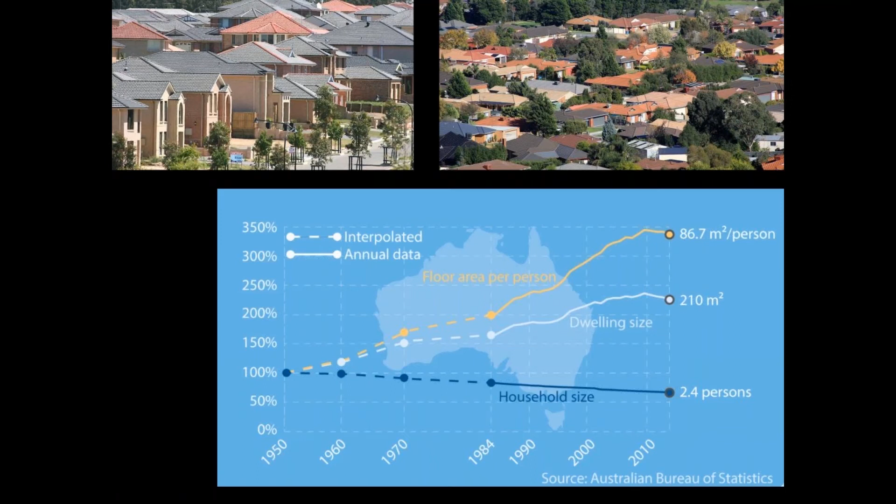So with all that we know today, why are we still consuming and degrading our land, our waters and sky with such a gusto? I'd like to suggest that we need to engage much more directly and empathetically with nature, especially as building designers and urban planners, because it's our actions that have extraordinary impact in this regard.

I fear that our souls no longer truly connect with the natural world, with the trees, the earth, the sea, as the souls of our forebears did. We watch David Attenborough on our TVs, and we fly across oceans as tourists when there's no COVID, to consume nature.

But we rarely venture into the forest right near our home to breathe in and give thanks to its majesty, and also to notice and mourn that it's suffering. We no longer put our hands into the soil to feel its warmth, its moisture, and its rich texture, to tend and savour its yield, without which we're going to go hungry.

So missing a profound personal connection with nature, and with our social gaze filtered on our buddies, and so struggling to see and feel things through the eyes and the hearts of others, how on earth are we to engage in the design of environmentally and socially empathetic homes and cities?

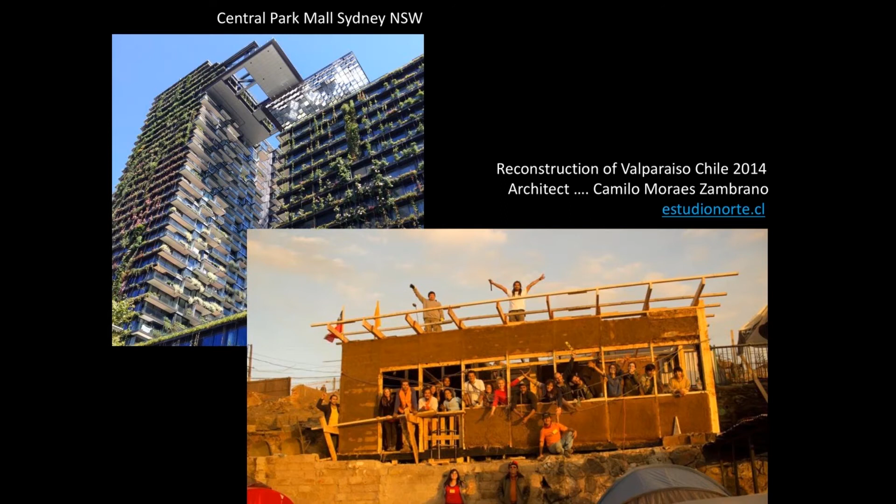Okay, so the following slides are from an outstation in south central Arnhem Land in Northern Territory, from Lake Tyers in East Gippsland, from Moa Island in the Torres Strait region, and from Palm Island in North Queensland.

I spent most of my first 12 years as an architect living and working with Aboriginal and Torres Strait Islander people in rural and remote parts of Australia.

So then, as now, Indigenous people from remote communities had very little opportunity to provide for their own housing or shelter needs. Government agencies delivered to communities housing which by its design was unsuited to the local climate and traditional lifestyle. And it adopted expensive and specialised construction methods that discouraged local labour input.

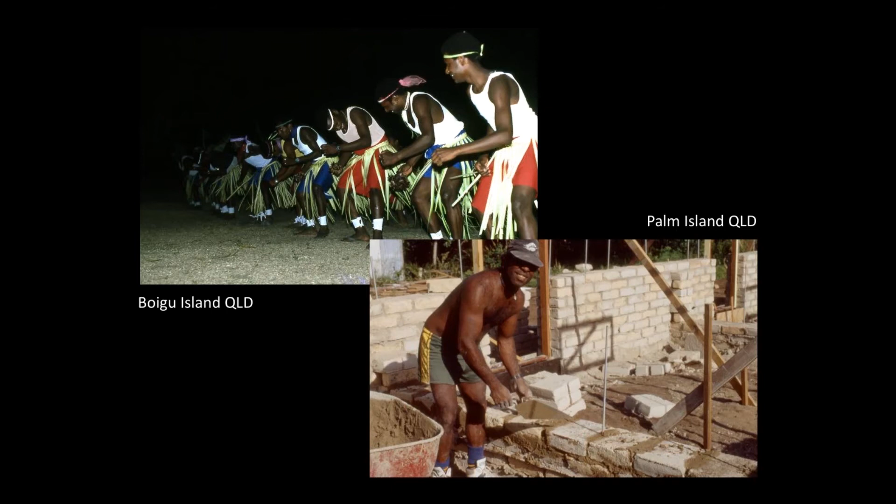Also, the government funds didn't go far, neither in product by way of roofs over heads, nor in the process of generating good work and a sense of homemaking in what were otherwise socially and culturally rich communities.

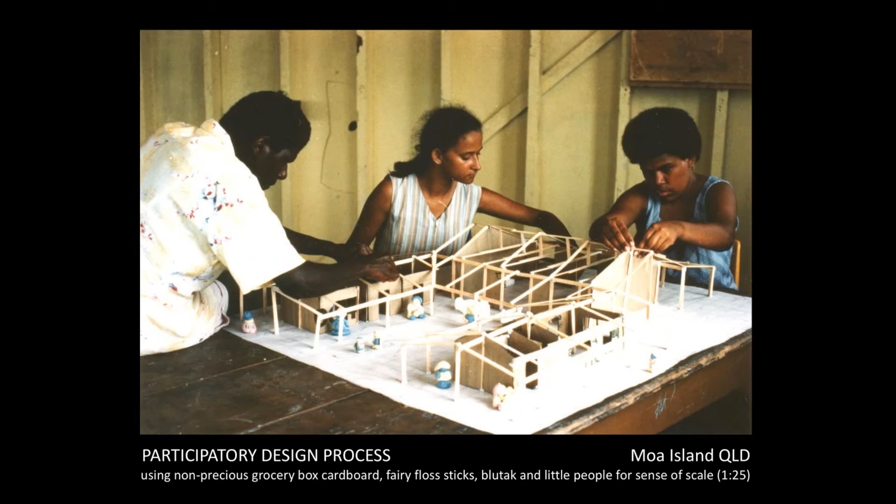My purpose in being there was firstly to encourage and assist the families who were without adequate shelter to design their own homes through hands-on model making workshops. These workshops centred on the rough and ready use of non-precious materials that helped families relax into continually building and demolishing parts of their model, so they could rework, discuss, and refine their evolving designs.

The workshops were accompanied by nights together under the stars in front of a projector screen in those days, discussing local climate, lifestyle, suitable building materials, and construction methods.

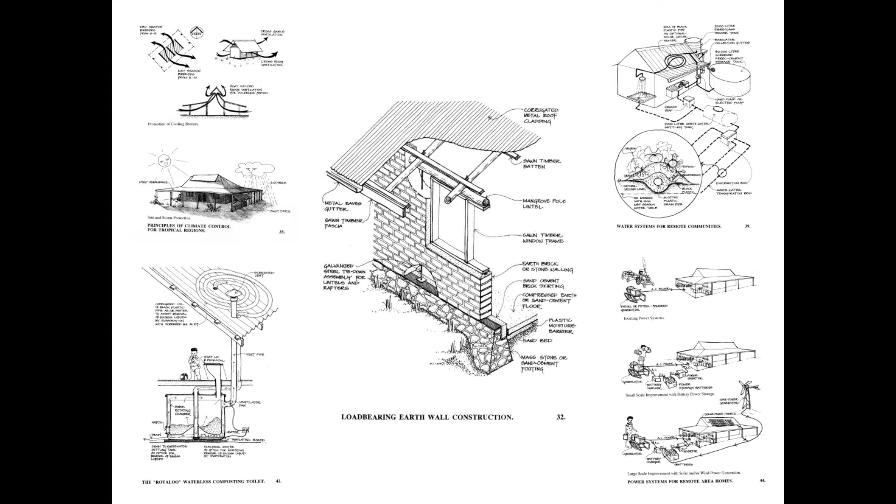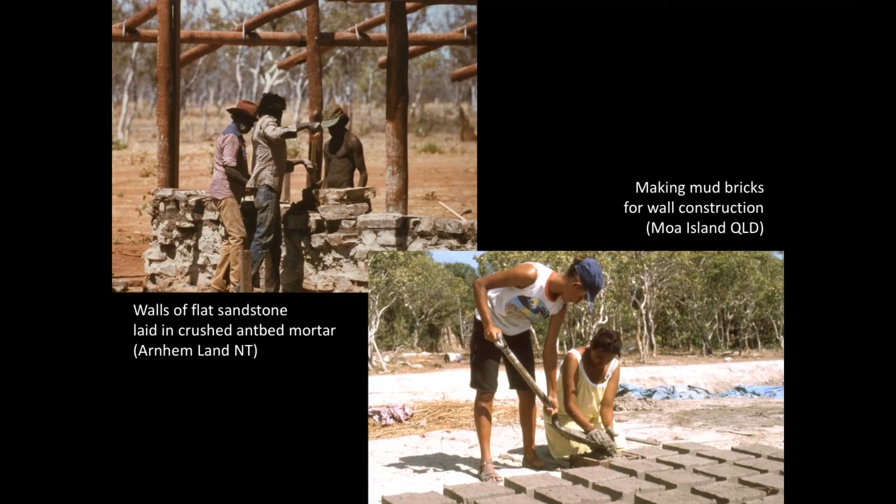The families then proceeded to build their own homes using materials freely available in the local bush. The floors were of puddled and waxed earth. The walls were of stone laid in crushed antbed mortar, or ram pressed or hand puddled earth bricks. The roofs were framed in timbers in raw pole form, or milled with a simple chainsaw attachment. Some internal screen walls were framed in sawn timbers and lined with split bamboo.

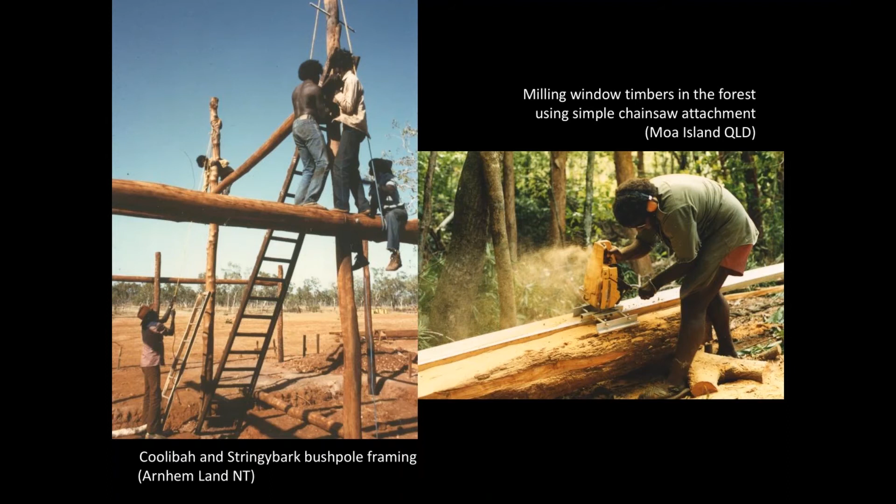I learned lots of great stuff in those years. To succeed, these self-help housing projects needed to start with a small and achievable scale of works. They needed a generous time frame that was realistic for self-help, which meant trying to shake off the time constraints typical in government funding cycles.

These projects needed a few truly committed and self-motivated prospective owner-builder families. They needed a genuinely and unanimously supportive community council, also modest financial support with no strings attached from one or two fair-minded public servants operating in low profile at the local level. Finally, they needed a commitment from myself to live and work with the community through both the design and construction phases.

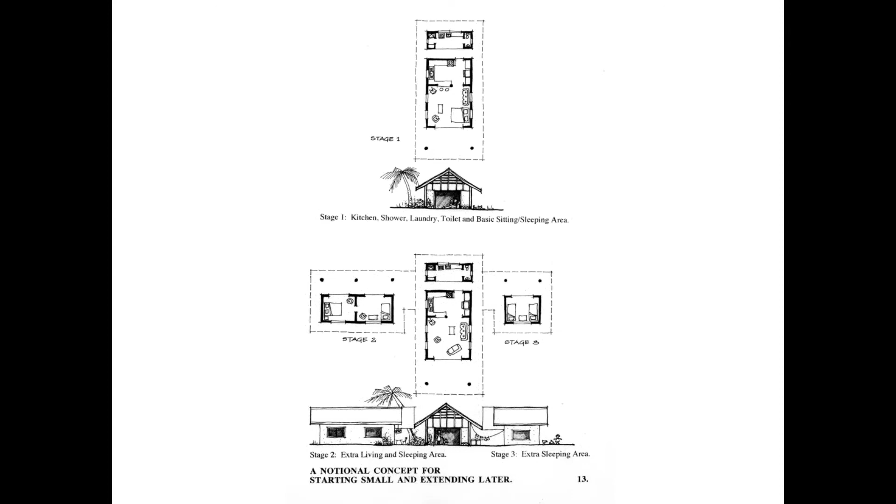The families had a common attraction towards stone and earth walling, which I found interesting. While they came to understand it offered no thermal benefit in a tropical climate, they chose it nonetheless because it was freely available in the bush, and also because, as they would say, it looked proper solid.

Traditional materials like bark, brush, bamboo, and woven palm were still favoured for temporary ceremonial structures and home decorating. But as primary building fabric, they were seen to provide inadequate storm shelter, pose a fire risk, and harbour vermin.

That white Australian desire for proper solid housing had really been taken on board, both in a functional and an aesthetic sense. My romantic dream for a utopia Tropicana up north was really challenged. I had to accept the reality of community aspirations and allow an architectural style to emerge from them as they designed, built, and explored what was meaningful to them.

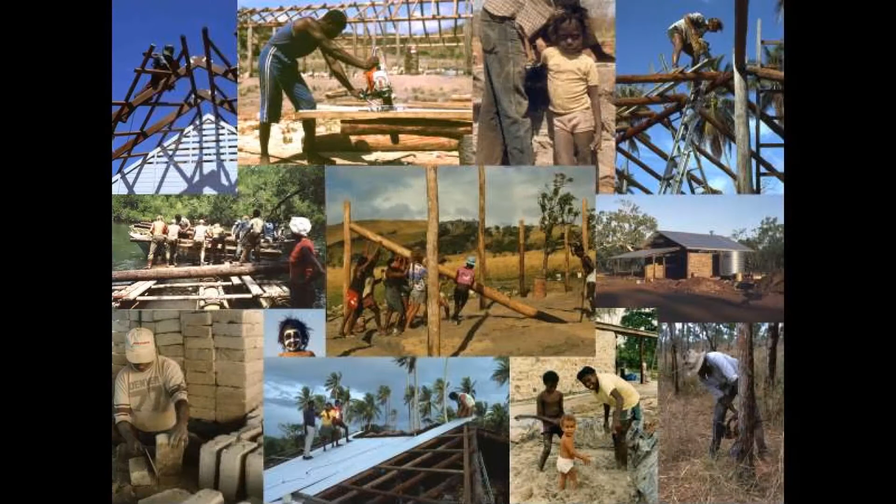It took these extended families years of determination and hard work to build their homes. Progress on site fluctuated enormously from day to day. It depended more on the talent of the family head in maintaining a strong and enthusiastic workforce than on my effectiveness in skill sharing and technical oversight.

Our workforce comprised men, women, and children, all with vastly different levels of skill, strength, energy, motivation, and free time. Certainly, we needed to adopt simple construction methods suited to a community workforce.

My biggest challenge was to support these people to function as a close-knit work team through thick and thin. That required careful observation, listening, diplomacy, counselling, and immense patience — abilities that don't come all that naturally to me. So that was my challenge.

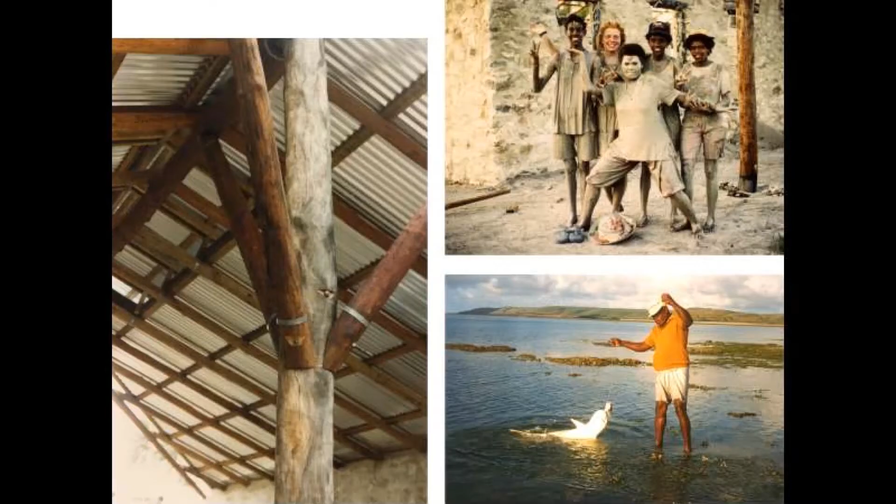I also came to realise that whilst it was right to encourage good workmanship, because that musters pride, it was also smart to accept what was less than perfect and to make the building site a fun place, where a rugby ball and a ghetto blaster were essential tools of the trade.

I came to appreciate that sometimes fishing lines were more attractive than deadlines. I needed to understand that during this time out from work on site, the human obstacles to the building process that had me so hot and bothered at times — things like family issues and community politics — were being resolved quietly and effectively, even without my knowledge.

These self-help housing projects were quite successful in that they brought home ownership within reach of families who were prepared to work hard. That in turn released community councils from the costs of maintaining and the problems of rent collecting that were so significant with council-owned housing. Also, the homes were built at a small fraction of the cost of those designed and delivered from afar by government agencies.

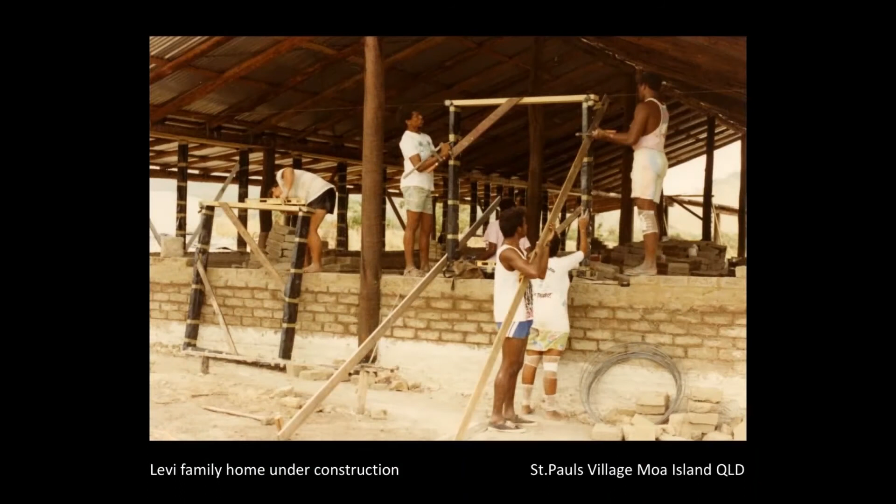These projects also provided community people with opportunities for skill development in building design and construction, and that helped them become more independent of government agencies in providing for their own housing needs. I like to think that we did build and design some worthwhile homes together, but I hope this story also illustrates the value of architecture when the focus is on the process as well as the product, because then it can build people and community as well as home and place.

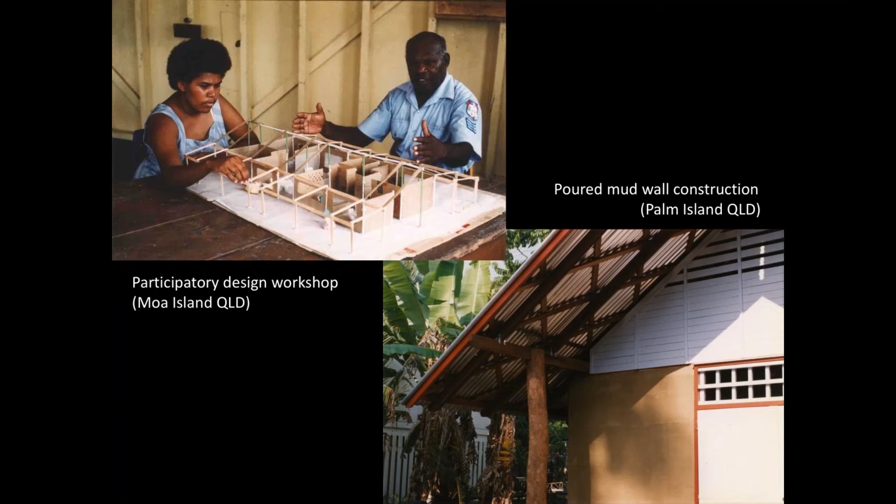Yep, I like to be clever with steel and wood and to have almighty opinions on the built environment and planetary sustainability.

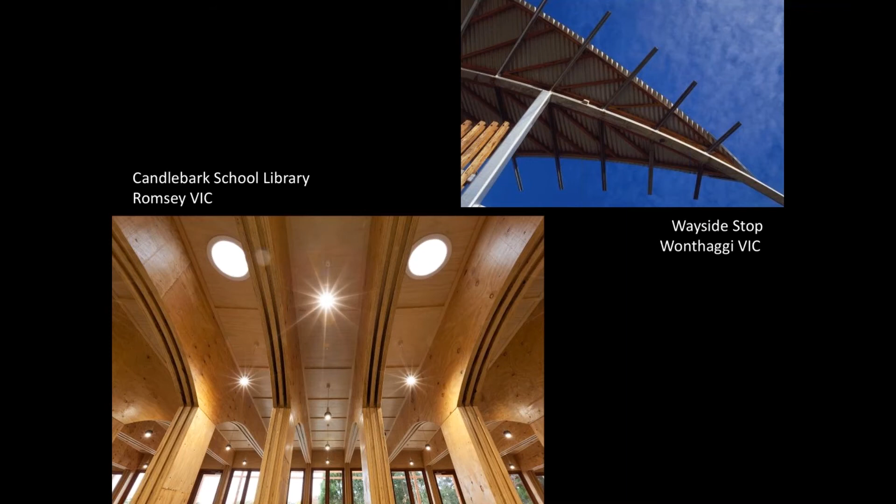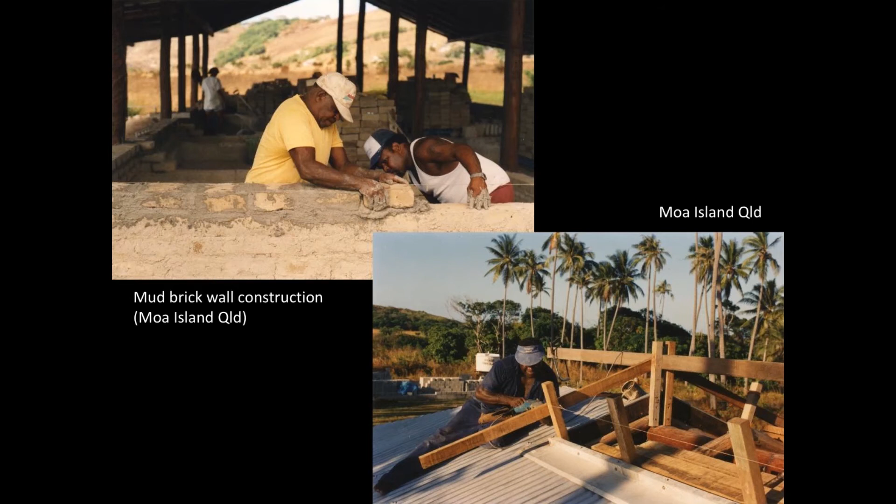But I also think that if we can view architecture as a verb, to quote John Turner, or as a culture for living, then we've got tremendous opportunity as a profession to freely share our expertise, not only with our peers and clients, but also with the wider community, because they can then become central players in a rich and collaborative creative process. In fact, I'd like to suggest that this might be the only way, in a climate and biodiversity emergency, that architects, building designers, and builders can make real use of our creative skill set and remain relevant as a profession.

Some years back, I worked at Candlebark, the small independent school established by John Marsden, who some of you might know because he's also written a string of very popular novels for teenagers. The Tomorrow series is probably the most popular.

I relished John's faith in supporting me to run a series of workshops with the whole school community - students, teachers, parents and friends - to elicit from them schematic designs for the upgrade of 6 daggy log cabins that made up the original school premises.

It was a heap of fun, and there were some pretty chuffed kids who saw their designs, or their schematic designs, constructed.

Whilst there's some complexity in the design detail of the radiating timber portals, this detail repeats itself throughout the building. That made it an inexpensive 2-week fabrication task for just one very smart country carpenter, Russell, and his apprentice, Jared, using basic powered hand tools in a nearby farm shed. So there were no whiz-bang CNC machines here.

The portals then took only 3 days to erect on site.

I'm not a great fan of green roofs and walls when they're incorporated at height as a shroud to a city building, but it made sense to have this school library come wildfire shelter constructed into the side of a hill with an earth-covered roof.

In combination with substantial insulation necessary for that southern climate, this earth cover provided exceptional thermal performance and also really great wildfire resistance.

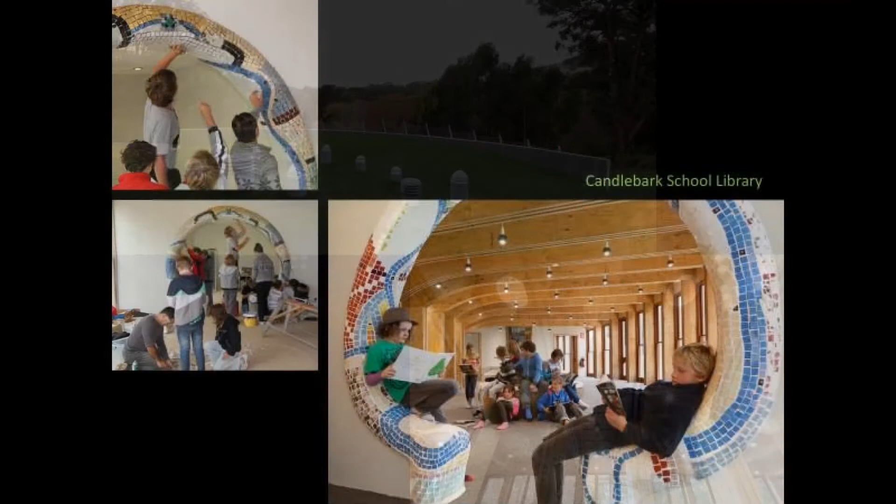At Candlebark School, I could see again that design technique and construction method kept simple and accessible to local people allows them to maintain command of and pride in the whole creative process.

Between 2002 and 2019, last year, I was heavily engaged with Mullum Creek. It's a peri-urban eco-housing project in Donvale in Victoria. My job there was to draw positive environmental outcomes from the project that go well beyond and address weaknesses in what was generally considered to be best practice sustainable development at that time.

Both in the early project framing, in preparing environmental design and construction guidelines tied to the purchase of lots, as well as through formal step-by-step design reviews and construction overview, we were able to steer some 42 lot owners, 38 architects and designers, building designers, as well as 29 building and landscape contractors to a range of environmentally sensitive practices in their own discipline.

Mullum Creek has taken all the obvious initiatives, like a required minimum 7.5 star NatHERS energy rating, 4 kilowatt rooftop solar power installation as a minimum, and a 20 kilolitre rainwater storage for every house on the estate. But we also had the opportunity to address core weaknesses in implementation of sustainable building standards in Australia. I'll tell you a bit about a few of our learnings, which we're desperate to share widely via the Mullum Creek website, magazine articles - you'll find some in Sanctuary and Renew magazines - and in presentations like this one.

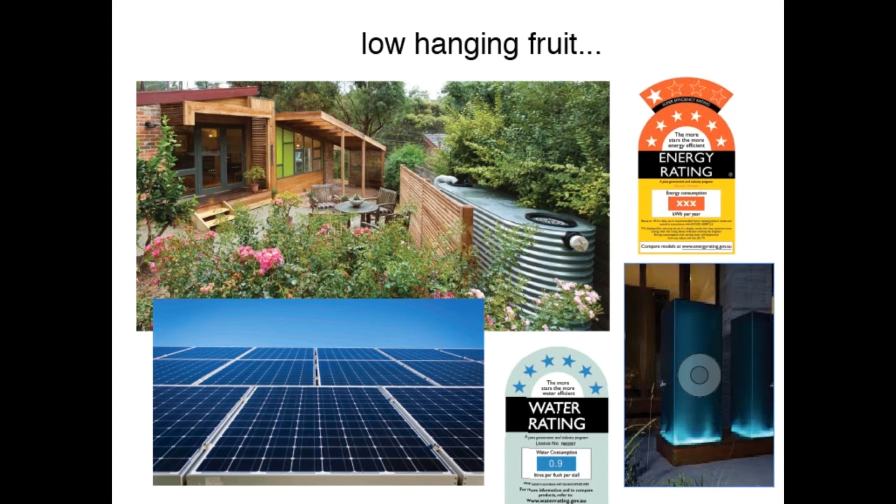Thermal performance is based on benchmarks, which for housing in Australia have been set by the BCA at 6 star, by Passive House at around 7 star and a bit, by design guidelines for eco-housing estates like Currumbin Eco Village in Queensland, Beyond Today in South Australia, the Cape in Victoria - that's Cape Paterson down in Gippsland - and Mullum Creek in Melbourne, and they're all at 7.5 star. Then by professional bodies such as the BDAV's Sustainable Design Challenge at 10 star. Now, 10 star implies that virtually no energy is required to heat or cool a house throughout the year.

And even a superficial review of this approach raises a bunch of issues. In 2016, Swinburne Uni and sustainability consultants Pitt and Sherry confirmed what some of us had long feared, and that's that the value of Australia's home energy efficiency rating system, the NatHERS, is for the most seriously eroded by lax and optimistic software data entry and by material substitutions and poor construction detailing on site. This terrific report demonstrated that these practices reduce the thermal performance of homes as built commonly by 1 to 1.5 star below their certified rating.

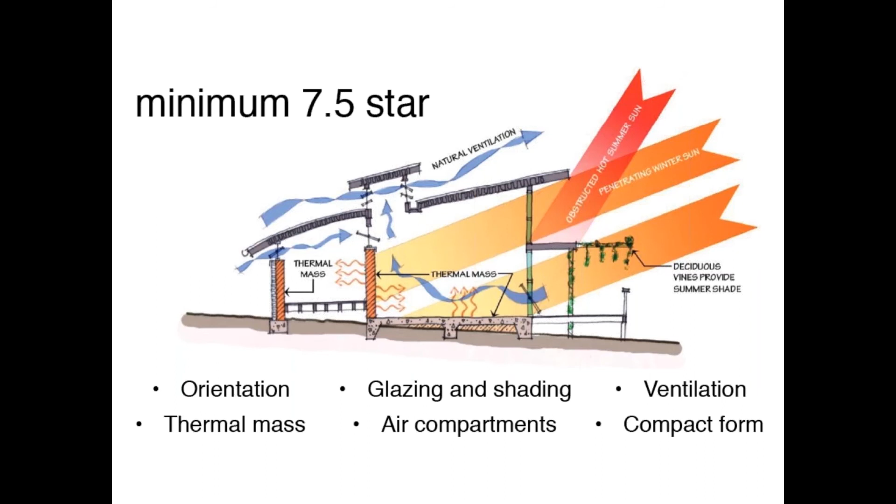So to that end, we modelled and prescribed 3D building and vegetation envelopes that were necessarily specific to each lot on this hilly estate, and inside of which all construction and all new planted trees must be contained. With the trees, it was assuming their mature height and bulk.

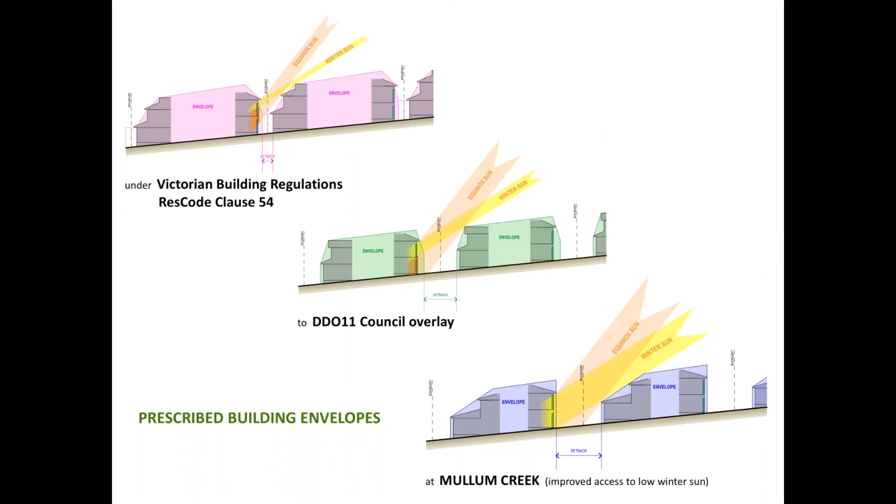Unlike standards that apply via planning codes and overlays to other housing developments in cooler climate zones of Australia, these Mullum Creek envelopes preserve full interlot solar access for each home, even in the depths of winter.

So we simply placed dwelling forms as they were submitted to us. They came as 3D models. They were submitted to us for design review, and we placed them into the prescribed envelopes on the terrain of our 3D CAD master file.

You can see those envelopes still in ghost form, shrouding the building models. So it was then easy for us to identify where dwelling forms would encroach their envelopes and risk overshadowing neighbouring homes.

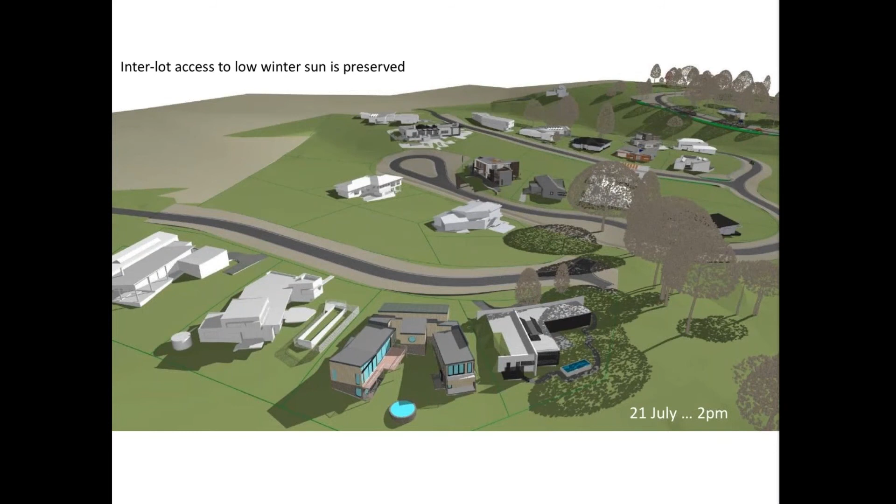An evolving estate master model that's regularly updated on the project website provides everyone - the lot owners and their architects, neighbours and council, web surfers, and of course us as the design review committee - an up-to-date virtual estate navigator tool for exploring things like view lines, shadow lines, and how all home designs on the estate are emerging well ahead of their construction commencing.

In cool temperate climates, it's not easy to achieve a genuine 7.5 star energy rating - that's a thermal performance that almost halves the space heating and cooling requirement attached to the nationally mandated 6-star minimum. We found that homes with anything other than a compact architectural form and a modest amount of well-orientated glazing would struggle to reach 7.5 stars without all of the following design features in place.

They need to have high levels of insulation in external walls and roof ceilings, double glazed windows with high thermal resistance and solar heat gain coefficient, and interestingly also, they then need to have substantial and continuous insulation to the lower floors or ground floors.

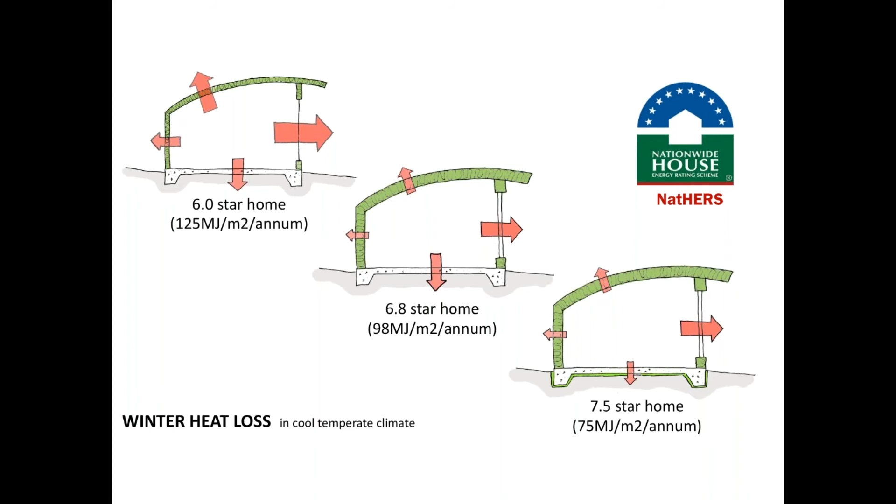Constructing an on-ground concrete floor with continuous under-slab insulation, to provide both good uninterrupted thermal resistance and internally accessible thermal mass - that's challenging, it's potentially expensive, and it's a practice generally unfamiliar to the Australian home building industry.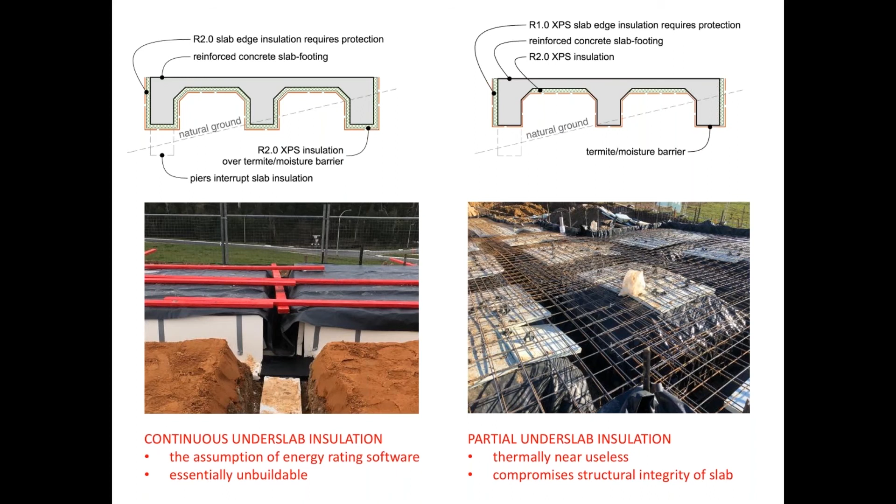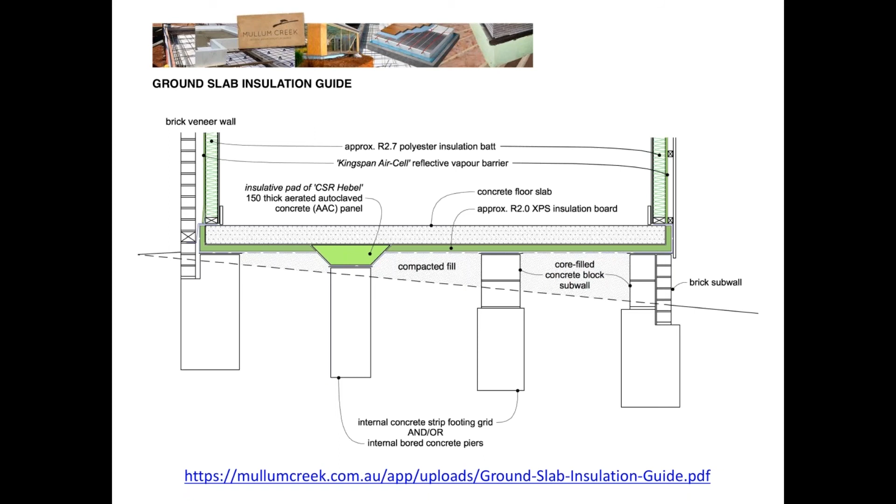For Mullum Creek, we advanced some of these solutions through our ground slab insulation guide, and you can find that on the website, along with construction details that are now being successfully implemented on the estate for these fully insulated ground slabs.

I think that if regulatory bodies want to raise the thermal performance of new homes in cool temperate climates much beyond the currently mandated 6 stars, then they first need to include in the NCC new practical default design solutions for insulated ground slabs to support this raising of the bar.

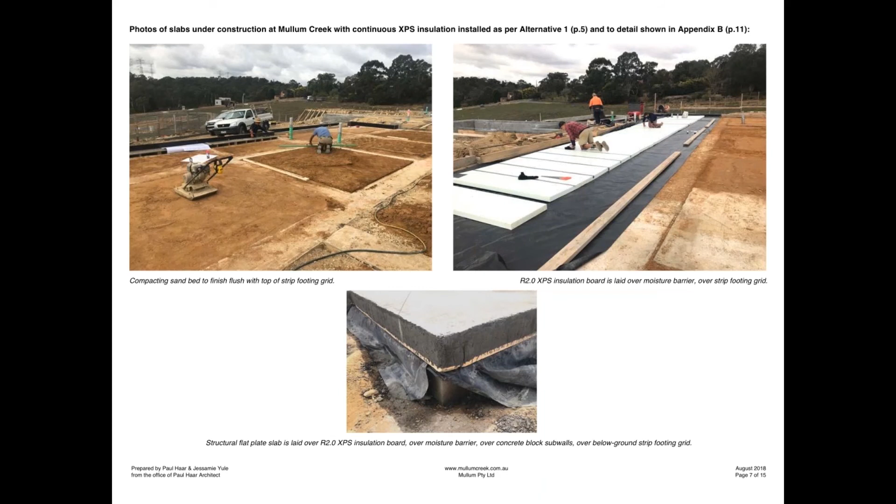Per square metre of floor area, and I stress that per square metre of floor area, it's fair to say that the operational energy and water efficiency of new housing in Australia is slowly improving. What this means, though, is that the materials used to construct buildings remain the primary driver of the overall life cycle environmental impact of a home.

Even more so for non-residential buildings. Building services and appliances attached to the operation of homes can be upgraded to embrace new technologies and provide improved energy and water efficiencies through what needs now to be a long service life for a building.

But our specification of concrete, steel, bricks and wood has more serious environmental impacts that are almost immediate, and for the most part are locked in—less so for us and more so for future generations to face by way of resource depletion, biodiversity loss and climate change.

If you believe the science as it's presented to us, what matters most now is how deeply and quickly we arrest CO2 emissions and biodiversity collapse. If we don't move mountains in the next 5 to 10 years, these scientists tell us, our future on this planet will be very bleak indeed.

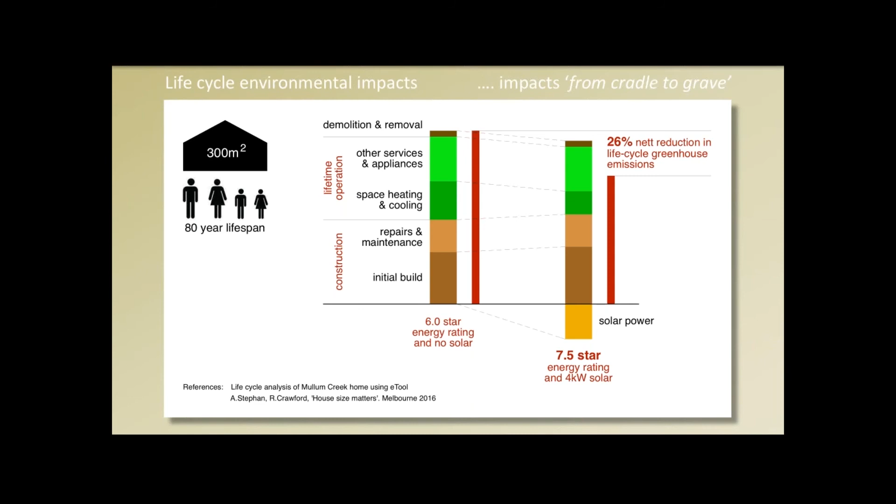Again, you can see from the research of André Stephan and Robert Crawford how much house size per occupant matters. It's been very disappointing to me that many of the homes in design and construction at Mullum Creek are way too big, despite the limits to scale that we set by maximum site coverage and prescribed building envelopes.

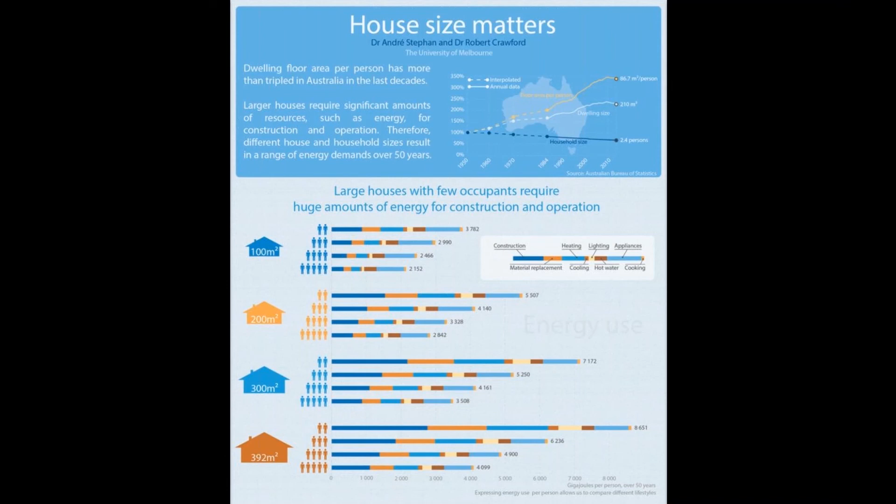It always brings me back to that question: how much house is enough? How much of the Earth's material and energy resources are needed to comfortably house an Aussie?

I've always really enjoyed working with them because they prefer to invest in quality, and particularly in fine timber craftsmanship that's without much environmental impact, the craftsmanship itself. They're not so keen on quantity, which invariably causes excessive consumption of finite material resources.

I remember a tremendous country builder we had there. He regularly described the project as one large joinery item rather than as a small house. So craftsmanship will cost you money without costing the earth.

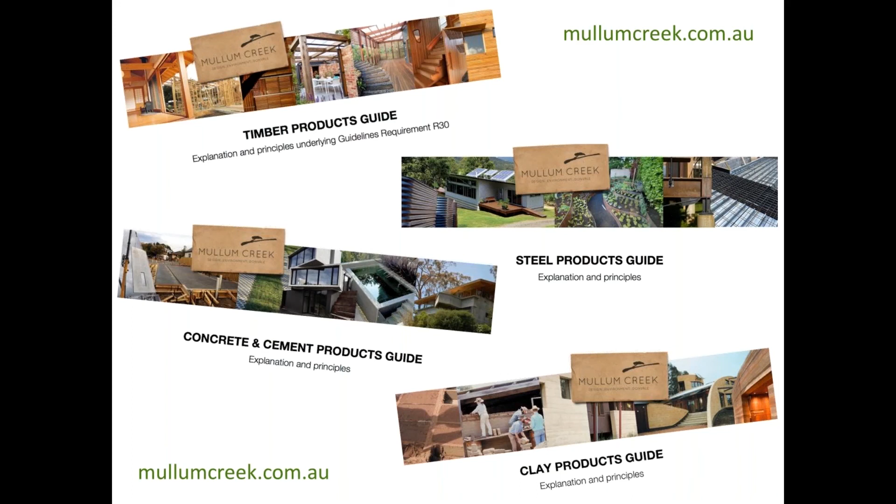To offset, at least in part, the considerable problem with building scale at Mullum Creek, we prepared a series of materials info sheets that attach to the estate's design guidelines and direct lot owners, designers, and builders to materials with relatively low environmental impact, either by formal requirement, as we did with timber, cement and concrete, or by informal recommendation, as we did with steel and clay products. These guides and info sheets are also freely available on the Mullum Creek website.

To pick up just two core building materials: the manufacture of Portland cement is responsible for a whopping 8% of global greenhouse gas emissions. So if you do the sums, that's about a fifth of everything that goes into the built environment attached to Portland cement in terms of global emissions.

Across the Mullum Creek estate, it's required that a minimum 30% of Portland cement used in concrete, mortar and rammed earth walling be substituted by other equally performing supplementary cementitious materials, or SCMs, such as slag, which is a waste from steel smelting, and fly ash, which is a waste from coal burning to generate electricity.

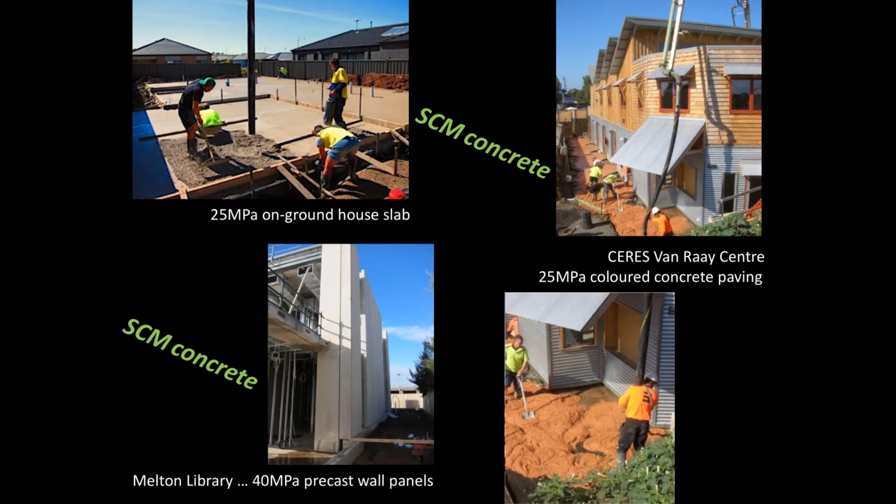These alternatives for wet mix concrete, as well as for bagged cement, are now readily available at most batching plants and hardware stores, certainly across our major cities.

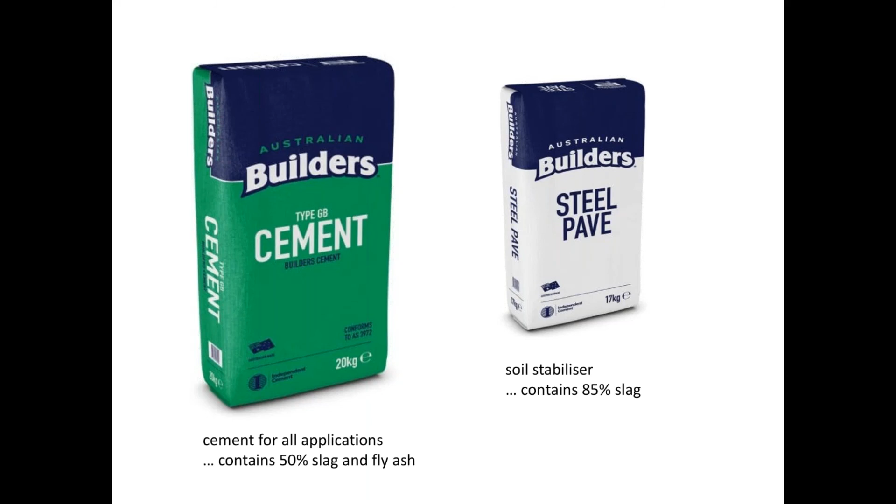To massively reduce the carbon footprint embedded in your builds with a no-cost, no-brainer, I'd strongly encourage you to specify concrete and cement with a minimum 40% SCMs included in lieu of Portland cement. Refer to the Mullum Creek Concrete and Cement Products Guide, and that'll make it a complete cinch.

You'll see it everywhere: wood is good, wood the ultimate renewable, responsible wood, make it wood. Well, contrary to popular belief and some heavy marketing, timber can be the very best or the very worst material you'll work with as a builder. It all depends on where and how it's sourced.

If it's sourced sensitively, it can store carbon through and beyond its service life in construction. It can be reused or recycled, or harvested from deliberately planted and sensitively managed forest that'll help maintain healthy ecological processes, sequester atmospheric carbon, and contribute to the social and economic well-being of rural communities.

But timber harvested insensitively can result in serious and irreversible impacts on flora and fauna, soil health and waterways. It can reduce or even reverse a forest system's sequestration of atmospheric carbon, and it can erode the well-being of rural and Indigenous communities.

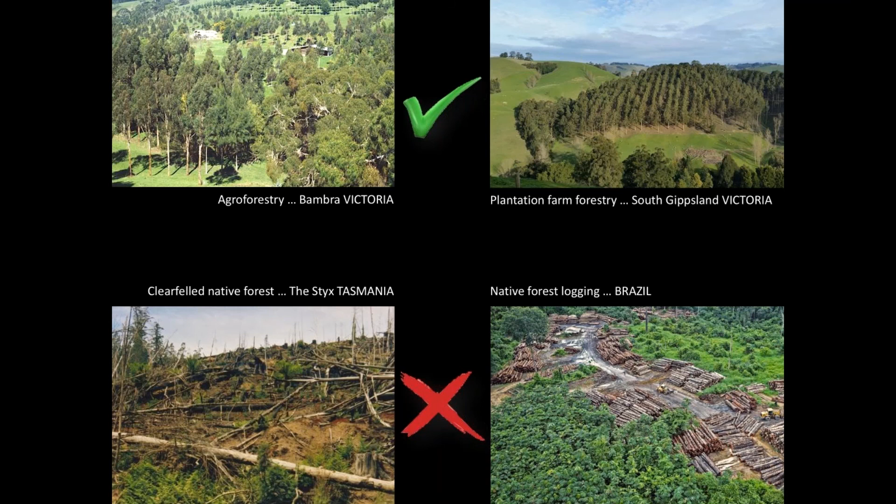Mullum Creek requires that timbers used on the estate be sourced in accordance with quite stringent environmental and social criteria. So essentially, they must be either on our approved timber products list, FSC certified from Australia or New Zealand, or recycled from a prior construction use.

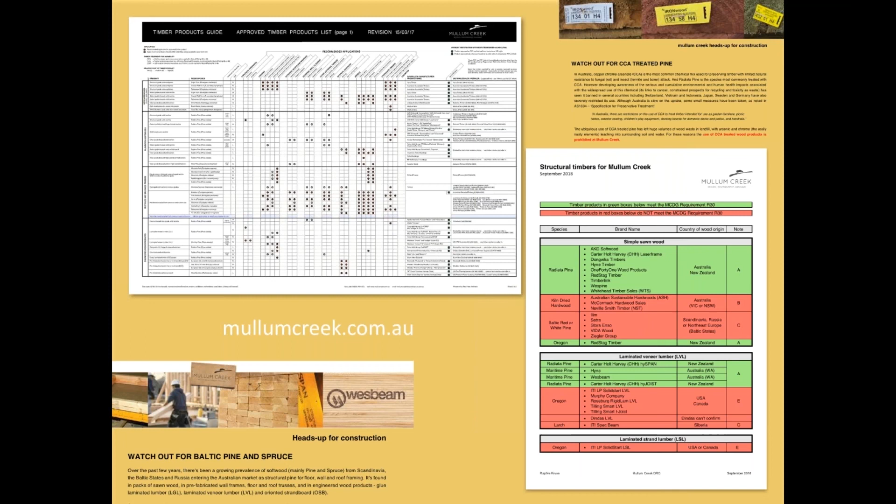We've compiled background papers and a comprehensive list of readily available timber products suited to all applications and budgets. So check them out on the website.

We've been really pleased, and a little surprised actually, with how designers and particularly builders at Mullum Creek are, with minimal resistance, embracing the sustainable timber products we're requiring them to choose from. We know they're carrying this product awareness to their other jobs, and it sends a strong message to the timber industry that a new generation of builders will only entertain wood that's sourced with true environmental and social responsibility.

Putting concern about building scale aside, the Mullum Creek project will certainly serve as an exemplar for site-sensitive building and landscape design. It'll showcase energy-efficient architecture, and it'll promote the use of environmentally responsible building materials, things you'll see in place on the estate.

But I think its bigger legacy will be in published and freely shared learnings, which is a welcome change from guarded IP. And it'll be in the advancement of people, so lot owners, designers and builders who've been able to engage with the project.

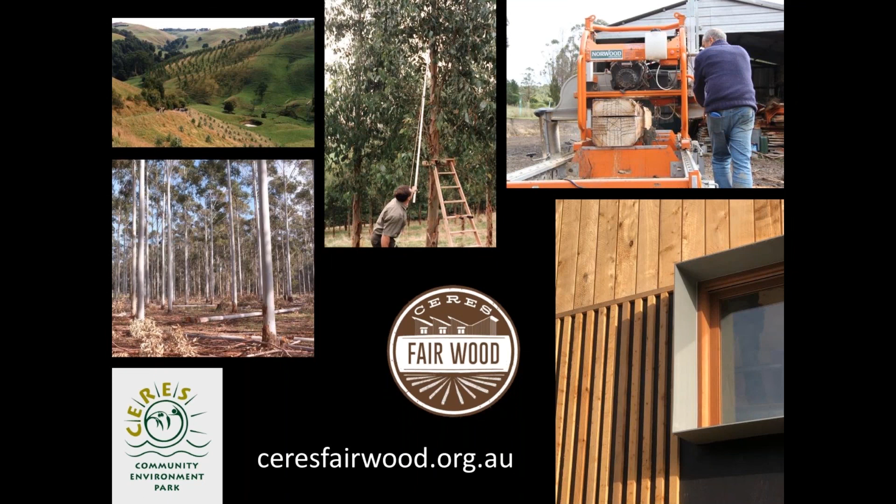Peter and Hayden at Fairwood aggregate and retail timber inside short local supply chains with Victorian and Tasmanian tree farmers and portable sawmill operators who they know personally. They're mainly small producers who are geographically dispersed through Victoria and Tassie, and they struggle to find, sell and deliver to a market that fully appreciates the farm-grown trees and the timber that they have on offer.

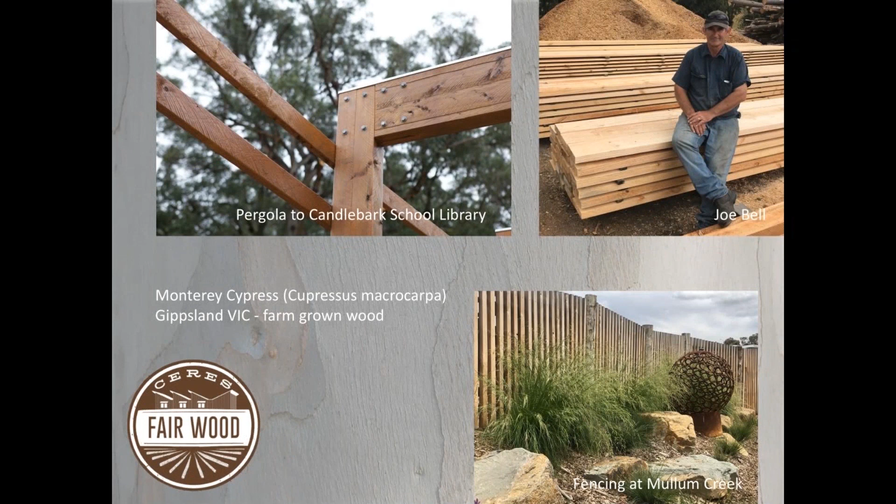So Fairwood buys or aggregates only from growers and millers who source wood to the highest standards of environmental and social responsibility, informed by the Mullum Creek project. It shares their stories directly with its customers - building and landscape contractors, furniture makers, DIYers, anyone. Fairwood's business builds direct friendships and understandings between city and country folk through this trade, and it encourages farming families to revegetate their bare paddocks with trees for conservation and for profit.

On its website, you'll see that Fairwood has a limited selection of local farm-grown and salvaged woods available as decking, wall cladding, flooring, joinery and landscape timber. It's only recently acquired a substantial warehouse that will now allow it to gather larger and broader stocks of very responsibly sourced wood.

In the next while, I'm also hoping to support Fairwood to become a timber broker. As an extension to the Ceres Environmental Charter, Fairwood would provide designers and builders with project-specific timber schedules based on architectural and engineering documentation that's submitted to it.

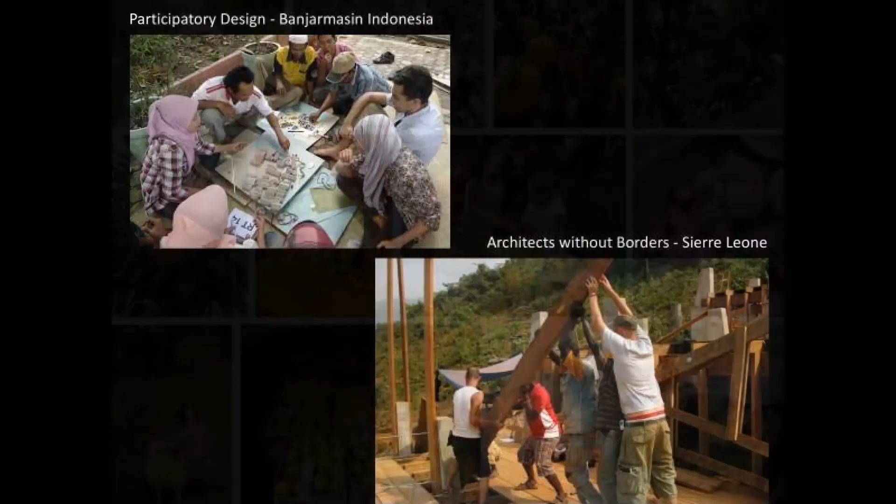So to you younger building professionals who are zooming in, I'd like to assure you that there are lots of fun ways to practice. The suite of crises we have in front of us can serve up as many opportunities as constraints. We can skill up to this emergency most effectively by collaborating generously, not only within our profession, but with absolutely anyone and everyone who's willing to play with us.

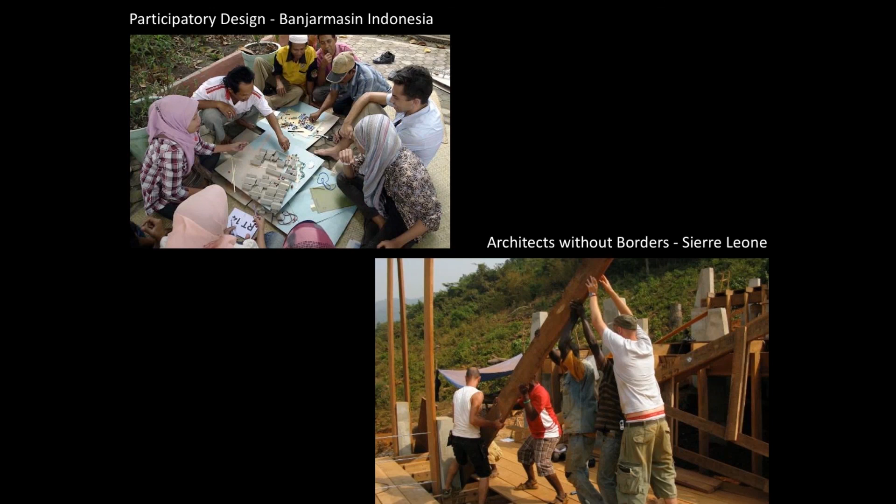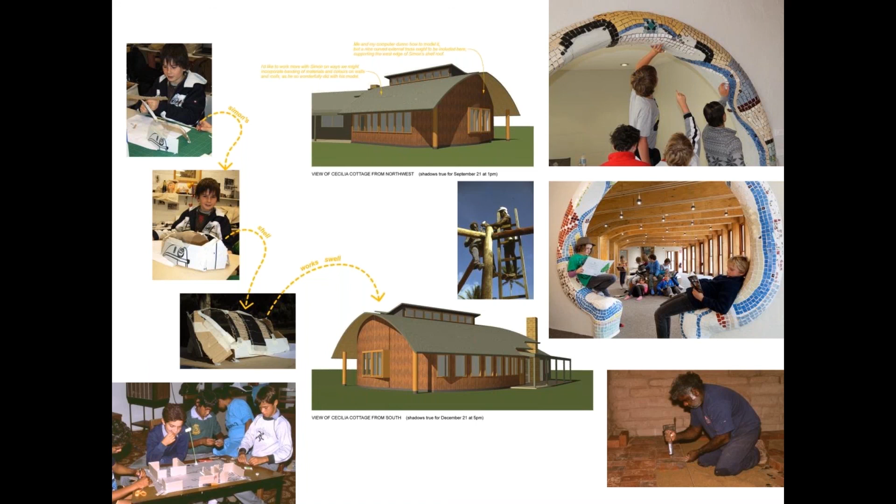We can include our building user groups as central players in participatory design and construction processes. We can influence and inform new aesthetic sensibilities that have us vomiting at the sight of wasteful opulence and excessive scale. We can celebrate proud self-builders. And we can be in awe of creativity that's born of hardship.

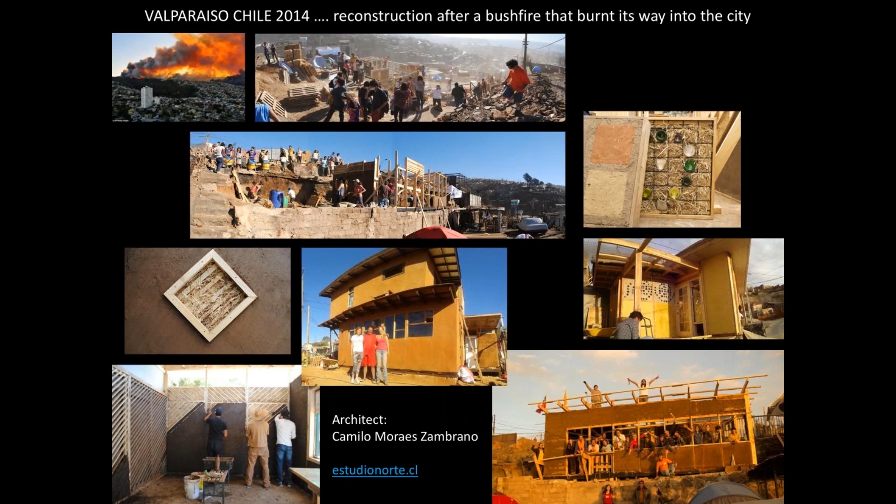We could even suggest that a green building needs to be one that's already there. So together, let's delicately rework existing buildings where we can, apply our finest design skills to minimize natural resource depletion and to give our planet a chance to heal.

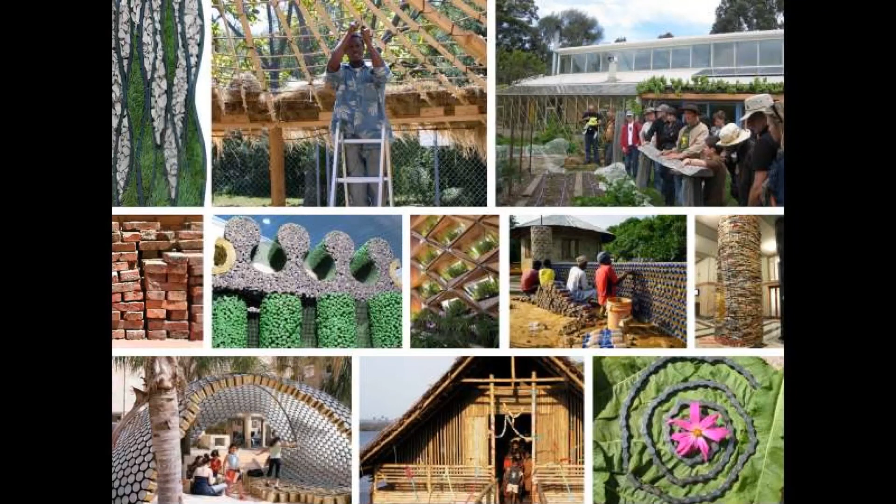Accept that a gentle architectural touch may not catch the eye of today's glossy magazines, but know that future life on Earth will be thankful for it. Now might actually be the time for a revolution in architecture.